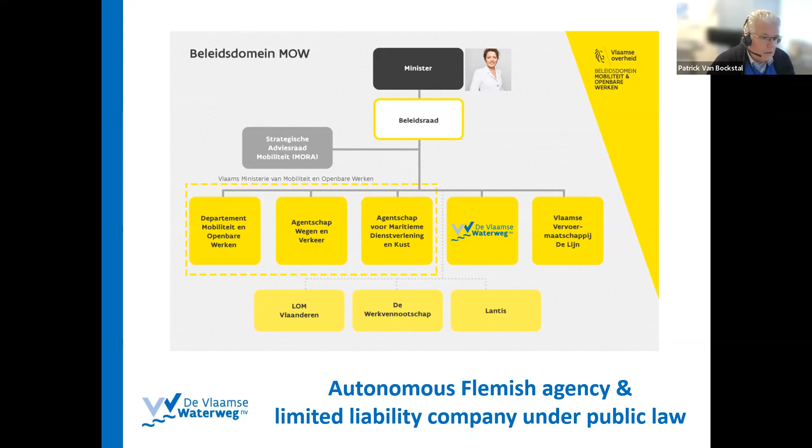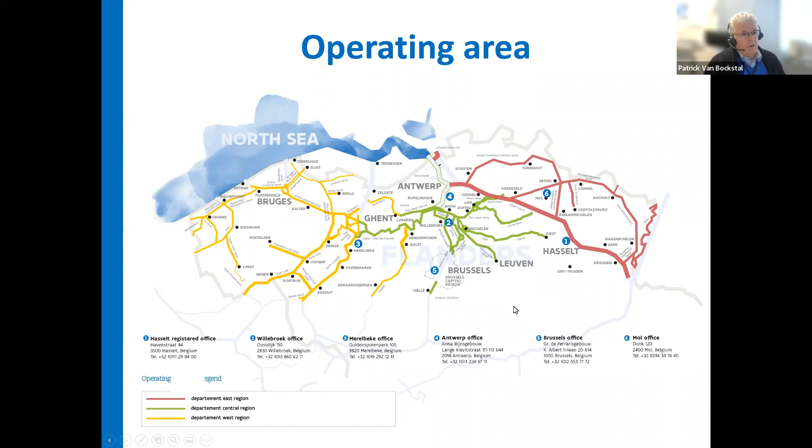This is our operating area. You see that we have three areas. The west area in yellow is mainly canalized rivers and canals. The central green area has mainly tidal rivers, the river Scheldt and its tributaries, and a few canals. And in the east area, we have mainly canals, for instance, the Albert Canal and a small piece of the River Meuse, close to the Dutch border in the extreme east of Flanders.

Of course, we are part of the EU corridors. Our main task is to maintain and develop the waterway network and its assets. We stimulate transport over water to improve mobility in Flanders. Of course, we apply our best water management, and we facilitate and stimulate other functions.

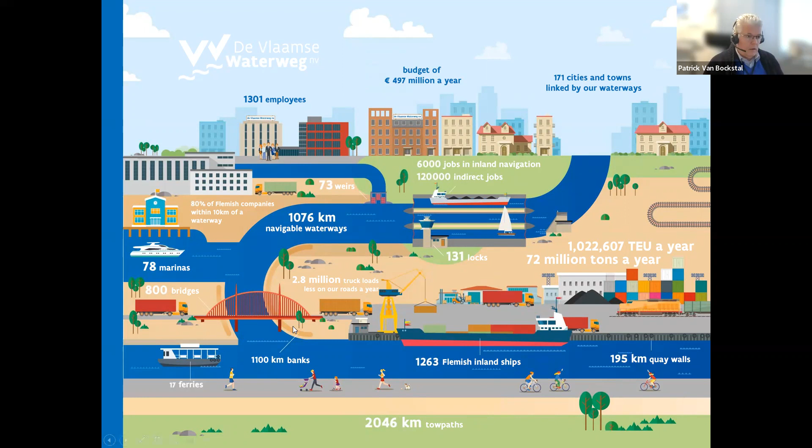Here you can see some key figures. We have 1,300 employees. We have a budget of about 500 million euros a year. 1,076 kilometers of navigable waterways, 800 bridges, 131 locks, 195 kilometers of quay walls, 1 million TEU containers transported per year, 72 million tons of freight per year, and 2,046 kilometers of tow paths along the rivers and canals.

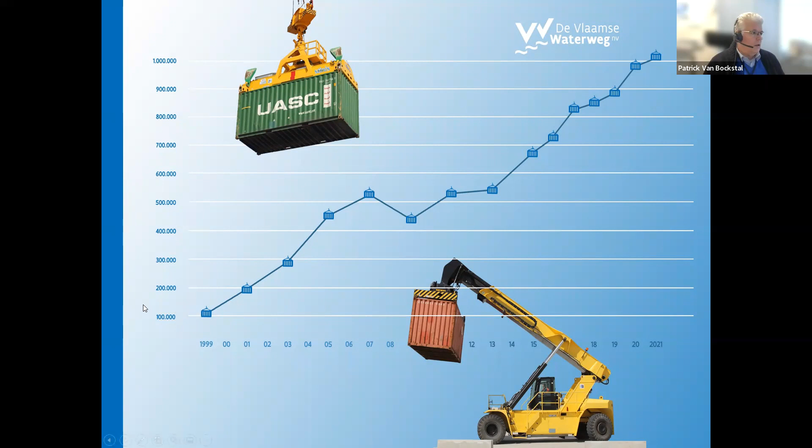The growth in the traffic of containers is quite spectacular. In 20 years' time, we have had a tenfold increase in the amount of containers transported, and that is due, of course, to the development of the container terminal in the port of Antwerp-Bruges, and it will still increase since Antwerp will increase its capacity in the coming years.

A couple of challenges: mobility will increase by 25%, at least that's what's expected by 2040. The second challenge is climate change, with an increase of risk of flooding and drought. We take on these challenges by investing in sufficient maintenance, developing the network, like for instance the Seine-Scheldt and the Albert Canal, and we invest also in infrastructure to deal with floods and droughts.

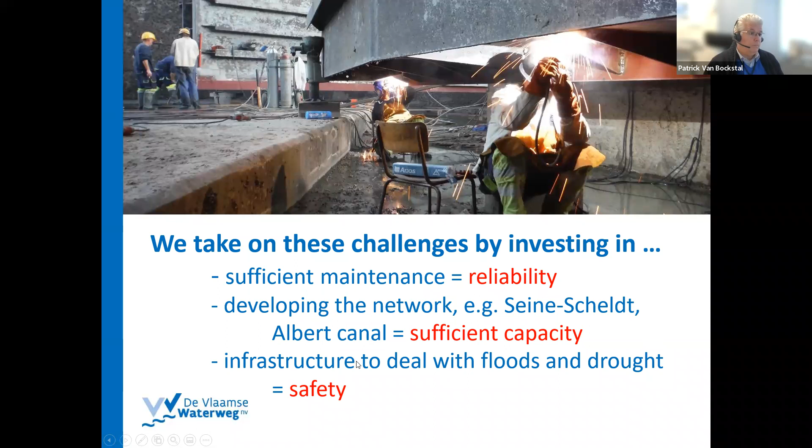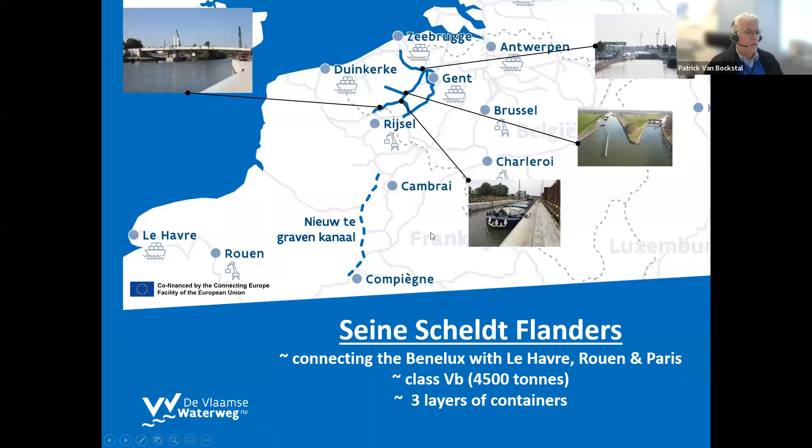This shows the Seine-Scheldt project, in which we try to connect the Benelux countries with Le Havre, Rouen, and Paris, and which needs investments also in France, of course, because there's a new canal to be created.

The upgrading of the Albert Canal. The Albert Canal is a canal that relays Antwerp with Liège. It also makes the junction between the Meuse and the Schelde basin. Here we are increasing the height of all the bridges to 9.1 meters, so as to make the transport possible with 4 layers of containers.

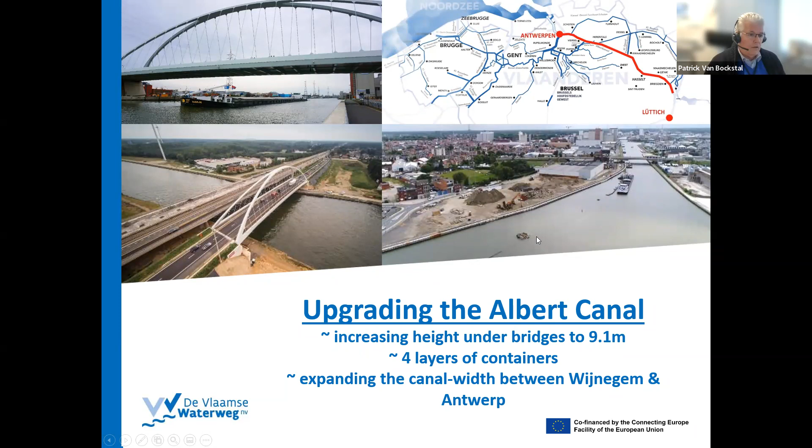And then there's the Sigma plan, but I will give another presentation, so I will not elaborate further on this here. We are also installing pumping stations and water power plants at the locks because of adaptation to climate change.

The good thing is that it can work in both directions. So in moments of drought, we can pump the water back, and in moments of too much water, we can use it as a power plant.

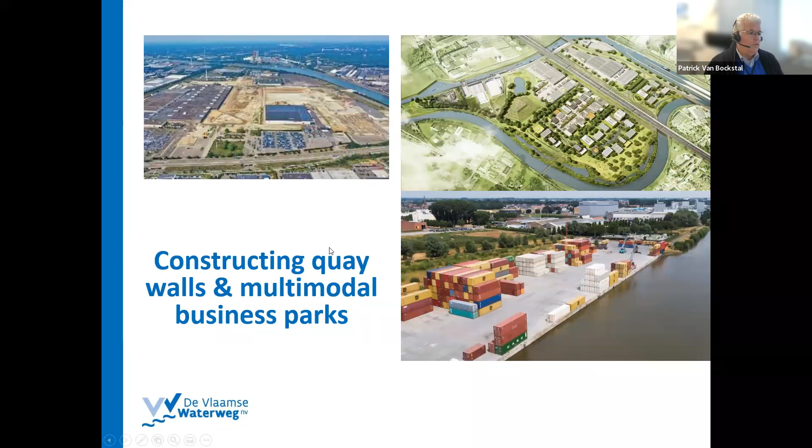We also invest in entrepreneurs, for instance, constructing quay walls and multimodal business parks. We invest in innovation and automation, with our smart shipping program. We facilitate innovative concepts of transport and loading and unloading. And we also invest in strengthening the multifunctionality of our rivers and canals. Our aim is to be a reliable partner for a smart, versatile, and prosperous inland waterway network.

So that was the first presentation about the Flemish waterways. I don't know if there are any questions, or should I continue with the second presentation? I'm trying to.

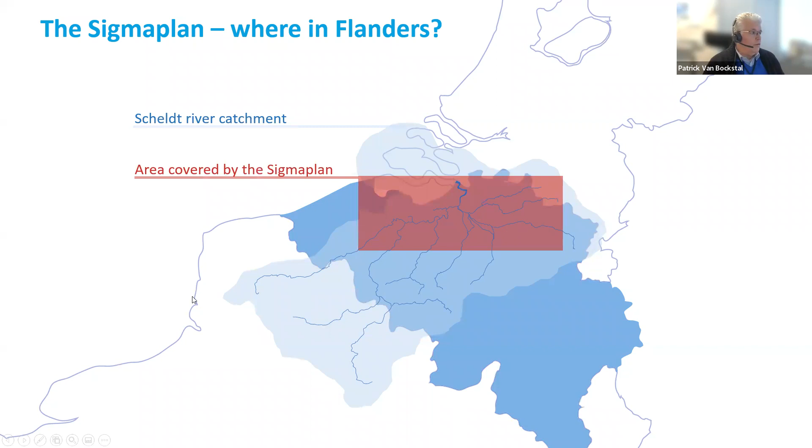The Scheldt River and its tributaries in Flanders form a tidal river system. The overall length is more than 250 kilometers, with a tidal range up to 5.5 meters in normal daily circumstances. The Sigma plan covers a large part of the Scheldt River catchment, and you can see where it is situated in Flanders.

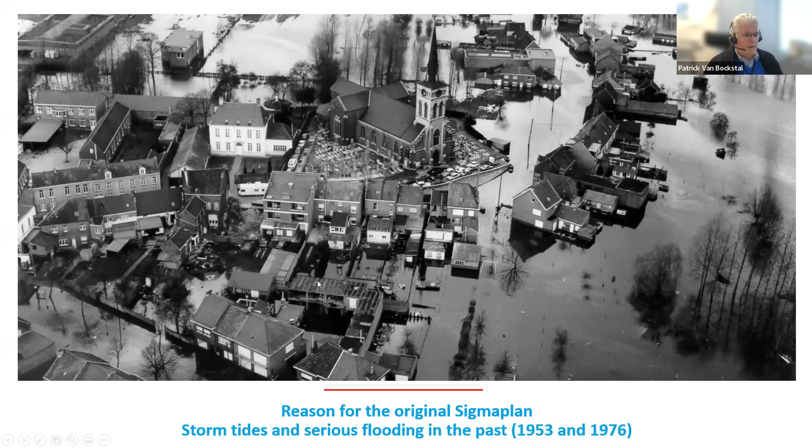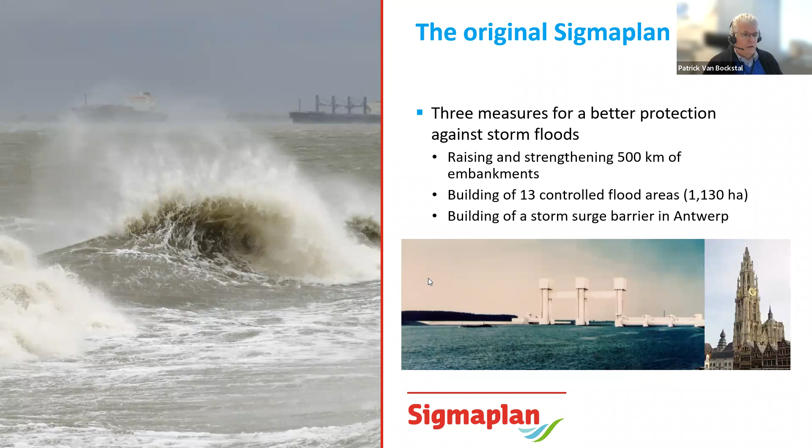In 2000, most of the strengthening and heightening of the embankments were finished. Also, 12 of the original controlled flood areas were constructed. The last one, the polders of Kruibeke, with a total surface of 600 hectares, was completed in 2015. The construction of the barrier was postponed indefinitely because a cost-benefit analysis showed that a storm surge barrier could not be economically justified.

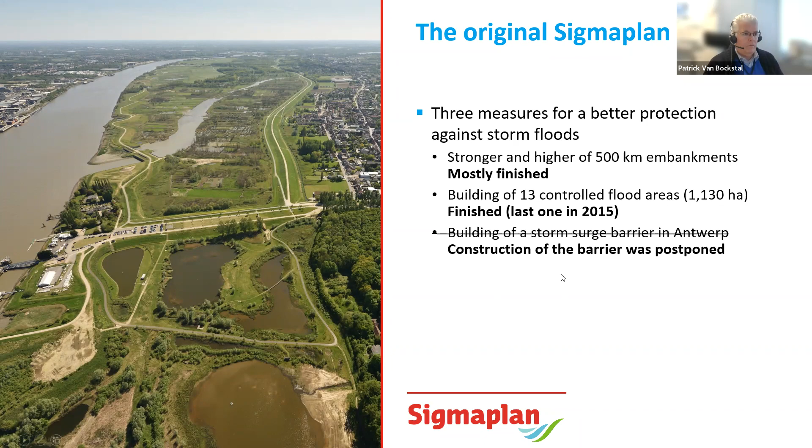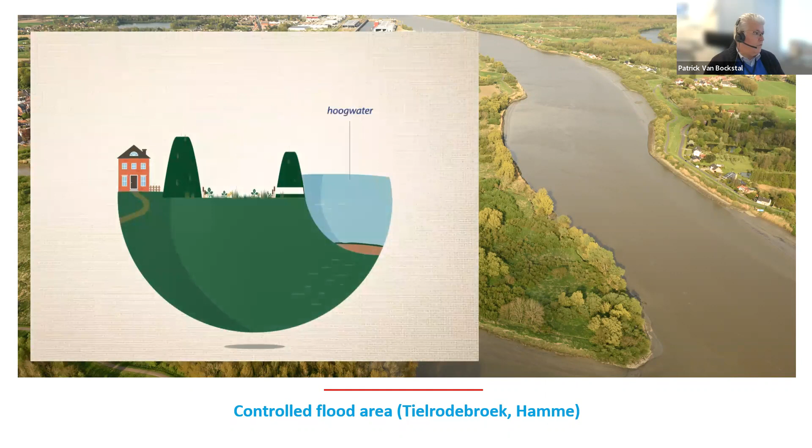One of the 13 original controlled flood areas is Tielrodebroek, with a surface area of almost 100 hectares in Hamme, where the Durme flows into the Scheldt River. Here you can see how it works: we have a so-called ring dike surrounding the area, and a lowered and reinforced existing river dike that is transformed into an overflow dike. There is a discharge sluice in the overflow dike to let the water go back into the river after storm tide.

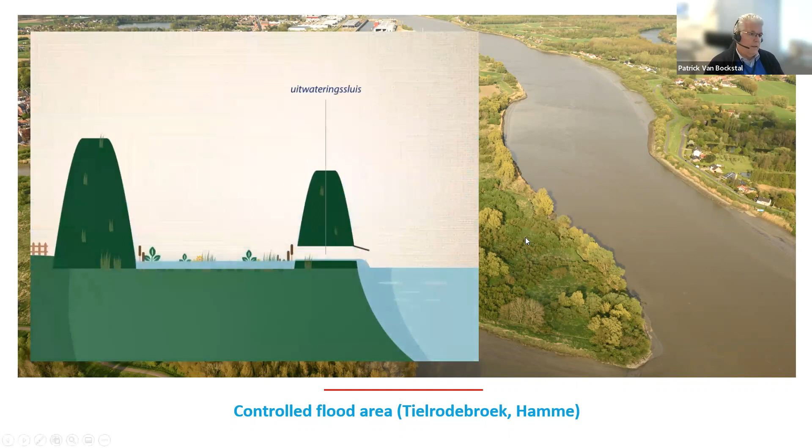This is the same controlled flood area, Tielrodebroek, after it's filled with water after a storm tide.

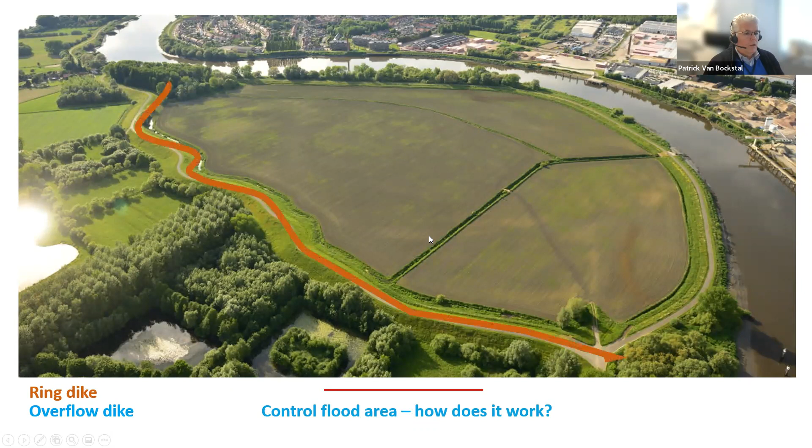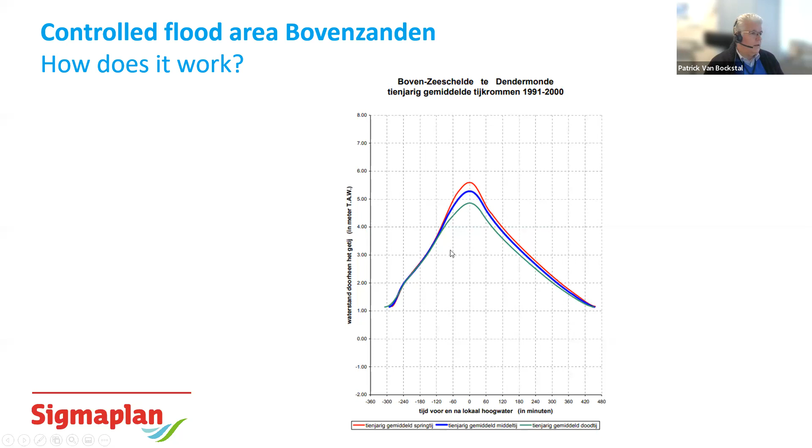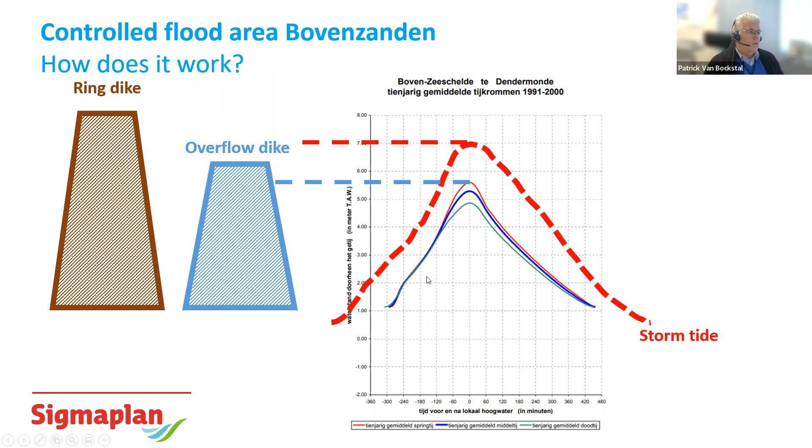Another one, this is Bovenzanden. How does it work? As I said, you have a ring dike and an overflow dike. This is a typical tidal curve of the River Scheldt in normal conditions, with the possible variations between spring tide in red and the dead tide in green. When a storm occurs, the water flows over the overflow dike, and is collected between the overflow dike and the ring dike.

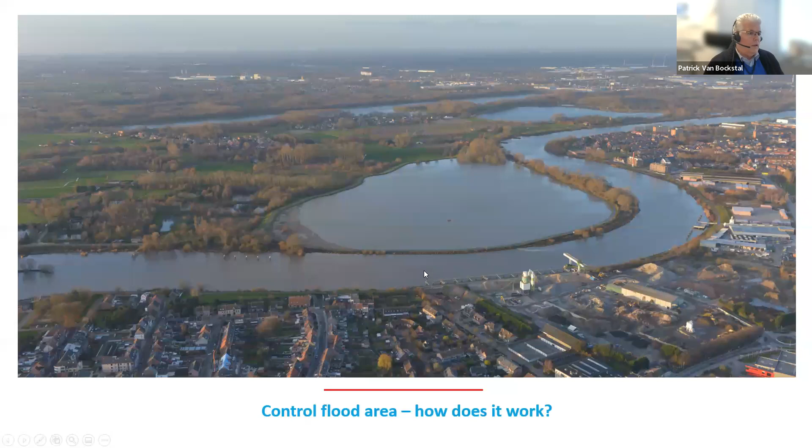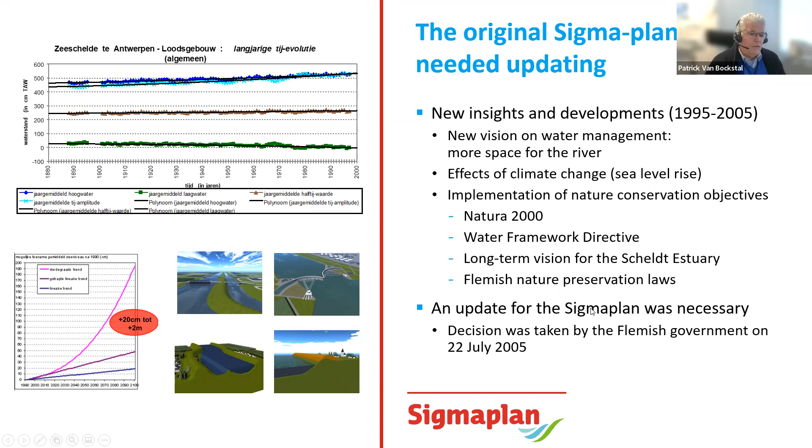The original Sigma plan, elaborated in 1977, needed updating because of new insights and developments. There's a new vision on water management in which we want to give more space to the river. There are the effects of climate change with sea level rise, and we also have to implement certain nature conservation objectives like Natura 2000, the Water Framework Directive, the long-term vision of the Scheldt estuary, and the Flemish nature preservation laws. So an update for the Sigma plan was necessary, and the decision was taken by the Flemish government in July 2005 to adapt the Sigma plan.

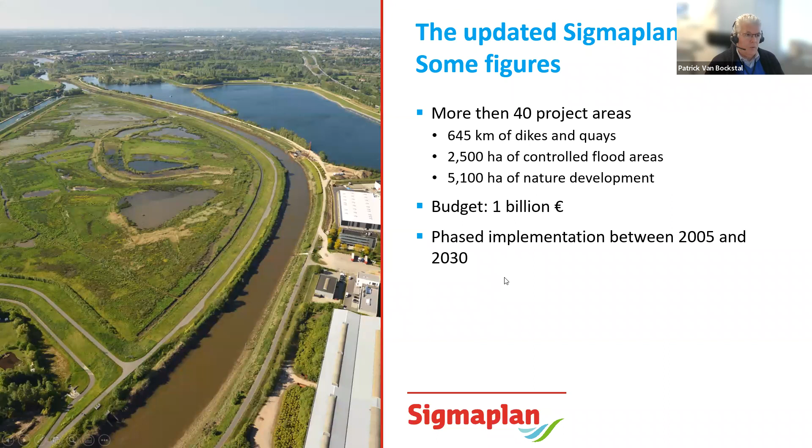Some figures on the updated Sigma plan: it consists of 645 kilometers of river embankments and quays, including the restoration and renewal of the Scheldt quays in Antwerp. This is important to protect the large city of Antwerp from flooding caused by storm tides. In total, more than 40 space-for-water projects were defined, allowing the realization of 2,500 hectares of controlled inundation areas and 5,100 hectares of nature development. The ambition is to complete the updated Sigma plan in 2030, if the budget keeps on flowing like it should, which is sometimes a problem.

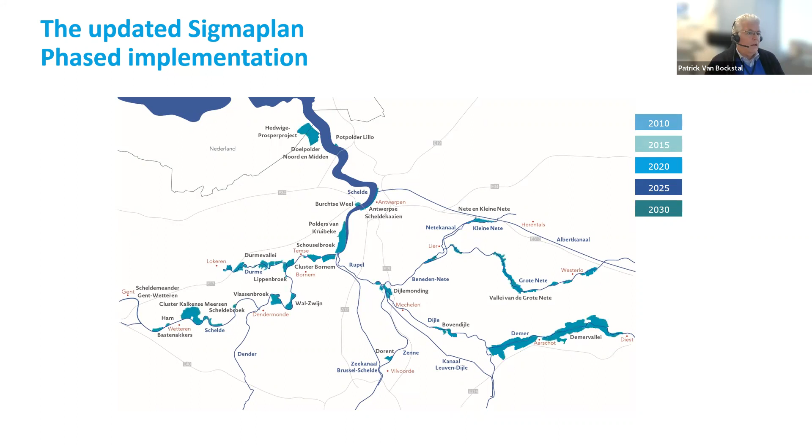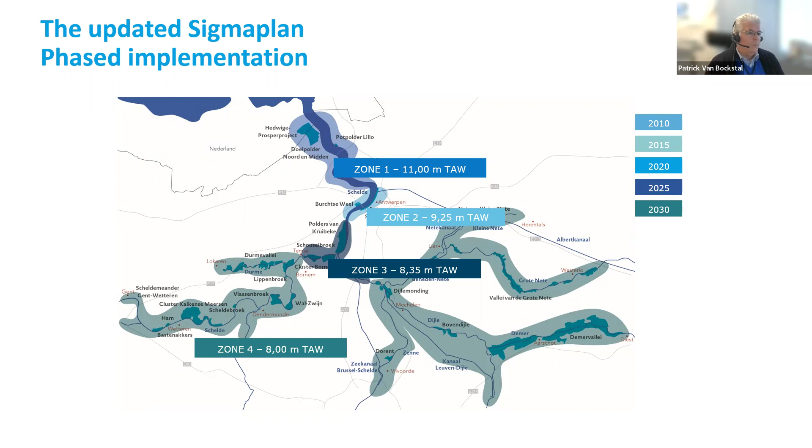In the Sigma plan, we try to work with nature-based solutions. It's about sustainable management and the use of nature for tackling socio-environmental challenges like climate change, water pollution, disaster risk management, and so on. Other names are working or engineering or building with nature, and ecosystem services are also involved.

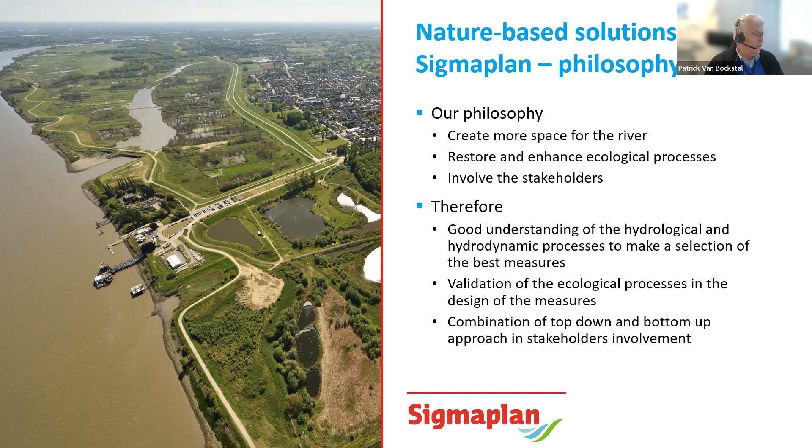Our philosophy is to work with nature, not to fight nature, and therefore we want to create more space for the river, restore and enhance the ecological processes, and involve the stakeholders. It is very important to have the support of a wide range of stakeholders in such huge projects with a large spatial impact. Flanders is densely populated and each acre of land is used for living, farming, nature, recreation, and so on.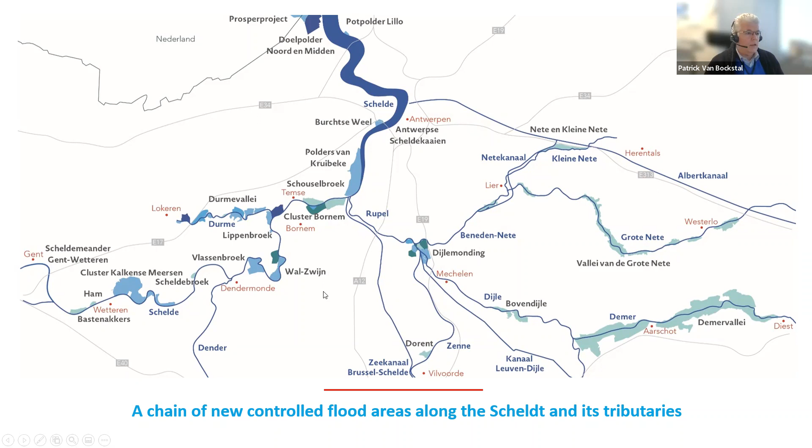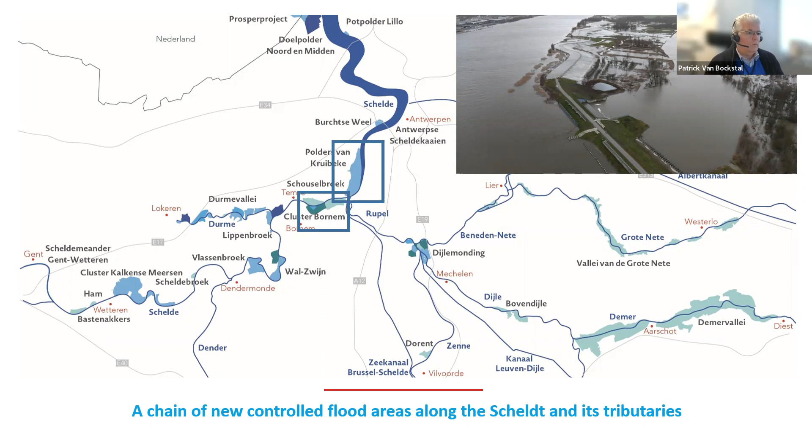So in the updated Sigma plan, we have a chain of new controlled flood areas along the Schelde and its tributaries. Here you can see some examples.

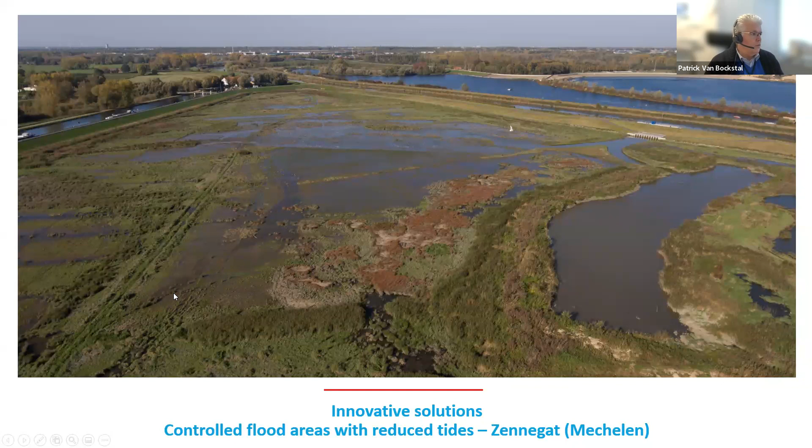We also introduced some new concepts such as flood control areas with reduced tides. Here we combine safety with nature development. During the last 100 years, a lot of the low dynamic tidal nature, such as mudflats and marshes, have disappeared. In the Sigma plan, we want to restore this type of nature. In this type of controlled flood areas, we mimic the tides, but in a reduced manner.

We do this by installing an inlet and an outlet sluice. Every day, a little bit of water flows twice in and out of the area on the rhythm of ebb and flow. This results in the creation of tidal nature with mudflats and marshes.

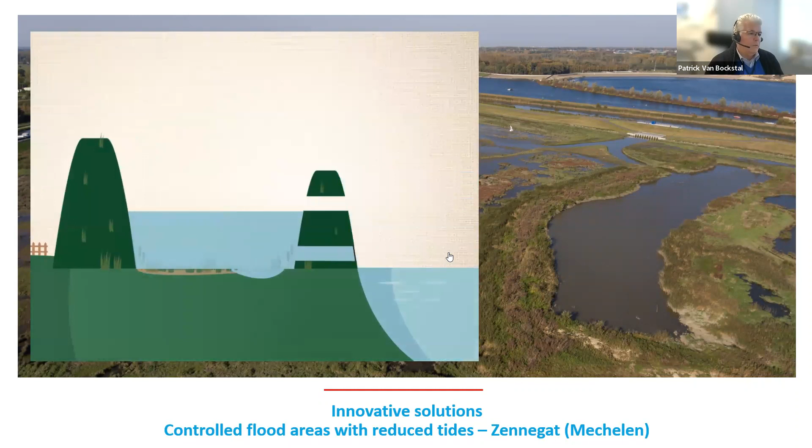When a storm arrives, then of course the area can fulfill its function of storage of water like a normal flood area.

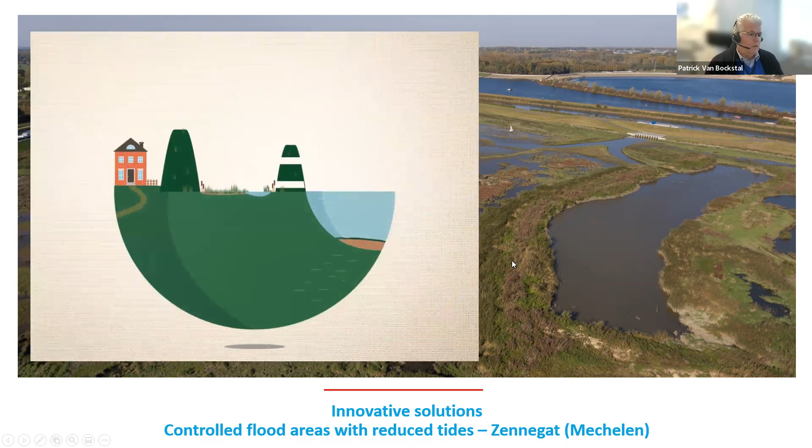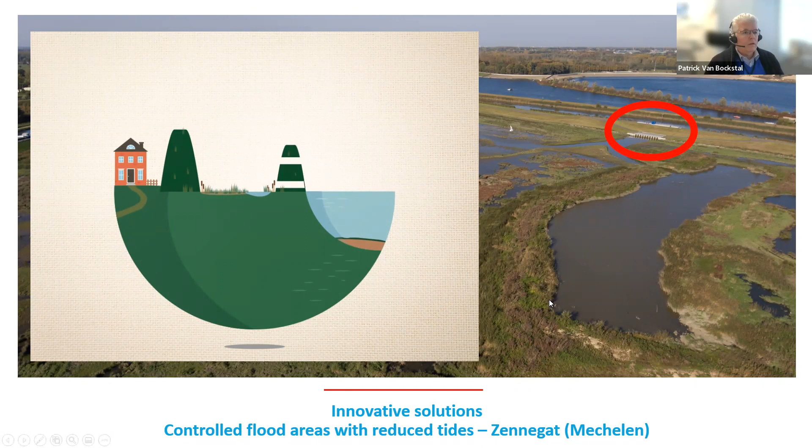Here on the right, you can see the inlet and outlet construction, and we have dozens of those in working. Here, for instance, you see the controlled flood area called Zennegat.

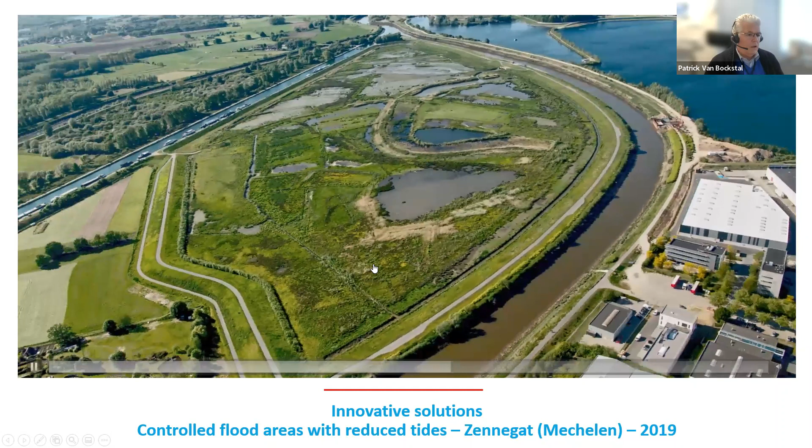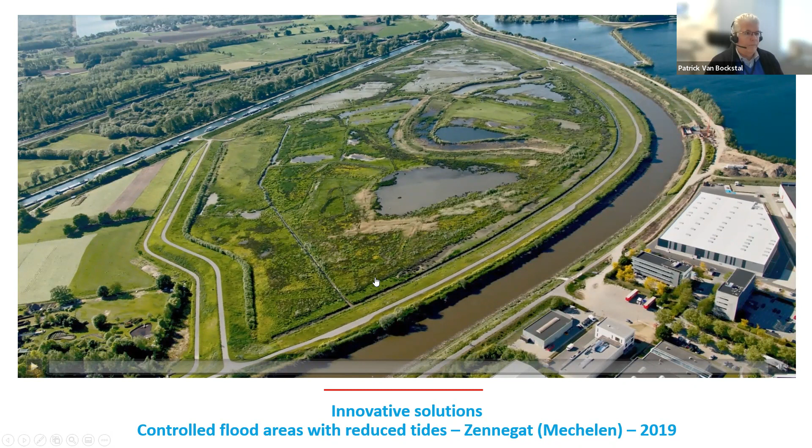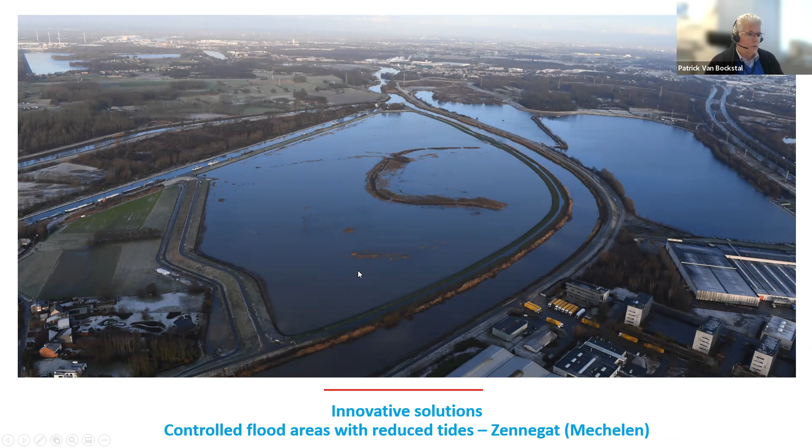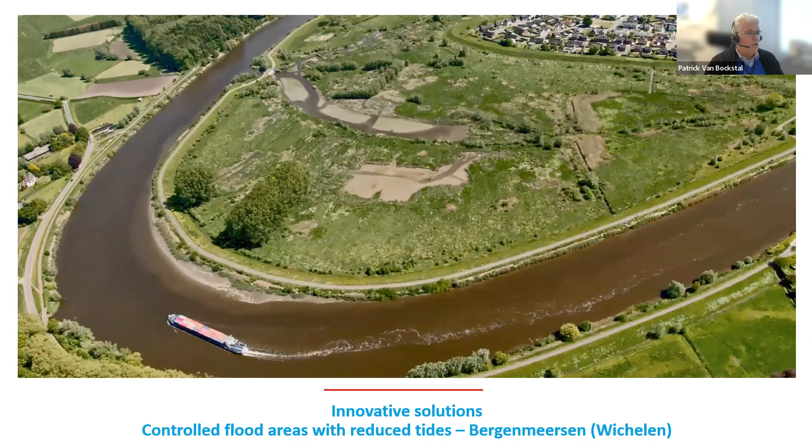This is another one, Bergenmeersen. In normal conditions, it's a natural space, as you can see, with marshes. And this is the same area after a flooding, after a storm tide.

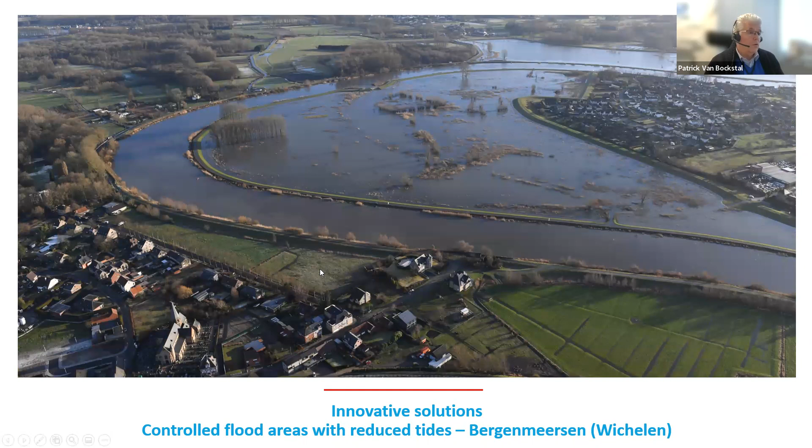A special project is the structural stabilization of 6 kilometers of Schelde quays in Antwerp. This is necessary because the quay walls were in bad condition. They were built more than 100 years ago. A specific stabilization technique is applied in each of the 7 zones.

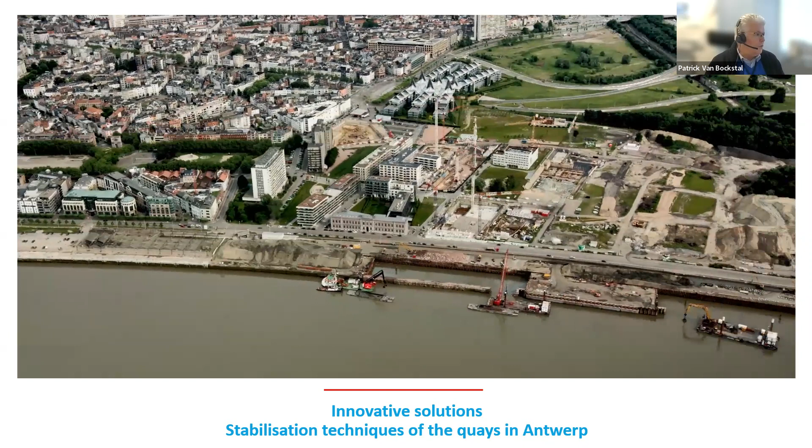After stabilization, we replace the existing water barrier with a higher and better looking alternative. In cooperation with the city of Antwerp, we give the quay a profound makeover to strengthen the link between the river and the city.

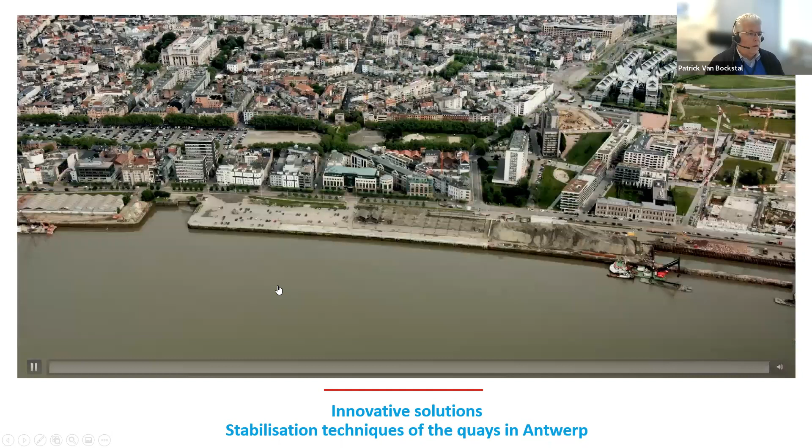Here, for instance, this section is finished and it shows the integration of a new public space after raising and stabilizing the quay.

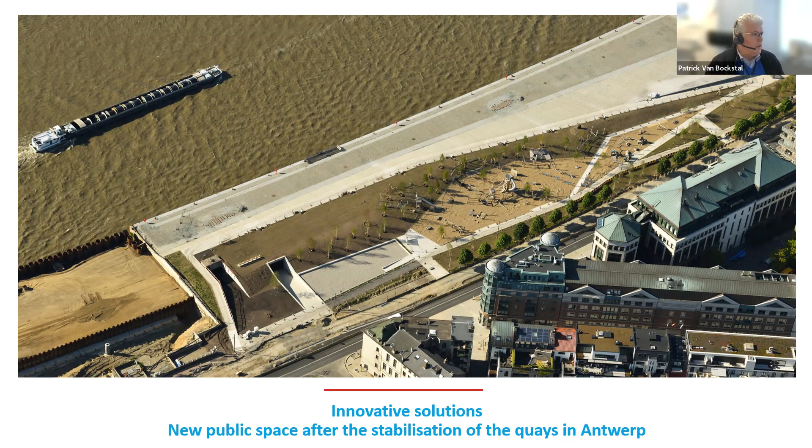Where possible, we create work with work. For example, in Vlassenbroek, along the River Scheldt, we constructed several dikes with dredged river sediments.

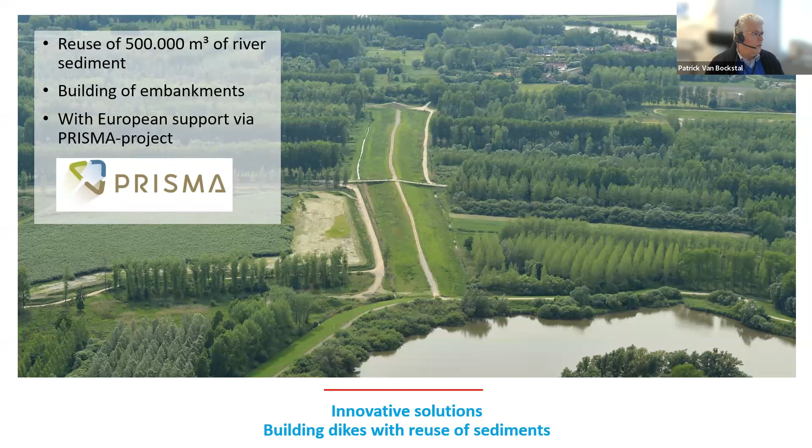There was an intense collaboration with the stakeholders during the preparation of the Sigma plan and during the realization of different projects of the Sigma plan. Stakeholder involvement has been achieved through a wide range of measures. In the next slides, you will get some impressions.

Visitors from different countries come to visit the project of the Sigma plan. I guess that's because it's quite innovating.

And in May 2018, the Flemish Waterways, the Agency for Nature Development, and IMDC won the 3rd prize for the PIANC Working with Nature Award for the project Kalkense Meersen, which is one of the flood areas. We are very proud with this recognition, of course, which shows how the goals of safety, nature development, and navigability can come together.